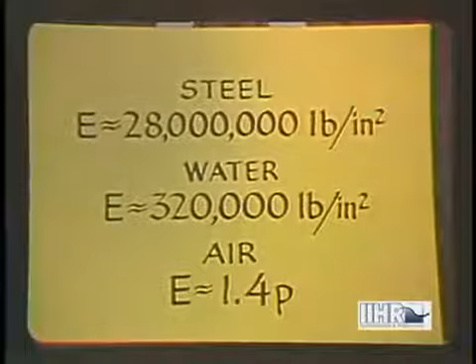Now we know that a substance even as rigid as steel has a finite elastic modulus, less than 30 million pounds per square inch. The modulus of a liquid, such as water, is about 1/100th as great, while that of a gas is very nearly the same as its absolute pressure intensity.

In the present film, we shall see what effect the actual elasticity, or its reciprocal, the compressibility of a fluid, has upon the patterns of motion that we have studied.

Under static conditions, the effect of compressibility is the variation of the fluid density with the pressure load, as may be seen by writing the definition equation for the elastic modulus in the form of a proportion.

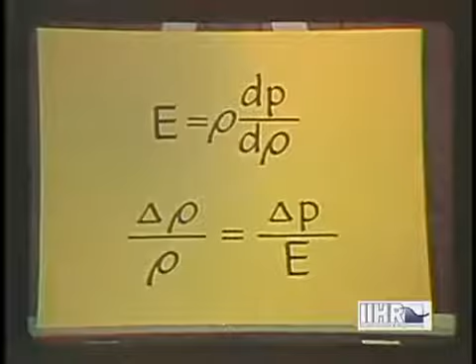Even at the bottom of the ocean, however, the relative increase in the density of the water is only a few percent because of the great magnitude of the elastic modulus.

The density of a gas, on the contrary, can vary from that of its liquid state under very high pressure to its standard value at atmospheric pressure. And we know that the density of air varies from its standard value at the Earth's surface to essentially zero in outer space.

Under non-static conditions, on the other hand, the effect of a local change in pressure is to produce a density change that is propagated elastically from the point of generation with the speed of sound. This speed, which we will call the elastic wave celerity, depends solely upon the elastic modulus and the density of the fluid under consideration.

As you will recall from the study of elementary physics, there is a great deal of similarity between waves of different types. In fluid motion in particular, a close analogy exists between gravity waves occurring at the surface of a liquid and elastic waves occurring within either liquid or gaseous media.

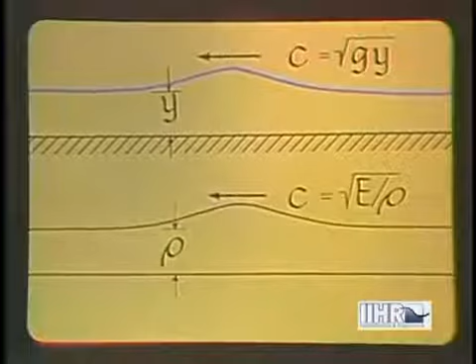Thus, whereas the schematic diagram of the propagation of a gravity wave represents a simple change in water depth, the same diagram could be used to represent the propagation of an elastic wave, the wave profile now representing a local change in density. Since elastic waves are usually visible only through use of a rather complex optical system, which we shall illustrate later, this analogy provides a very convenient means of simulating elastic waves by their gravity wave counterparts.

Elastic waves in water really correspond to gravity waves of negligible amplitude, because the change of density of a liquid is always very small compared with the density itself. A gaseous wave, on the other hand, is without limit in amplitude.

It has already been seen that a gravity wave of increasing size will become steeper and finally break. The elastic wave equivalent of such a breaking wave is known as a shock wave, about which more will be said at a later point.

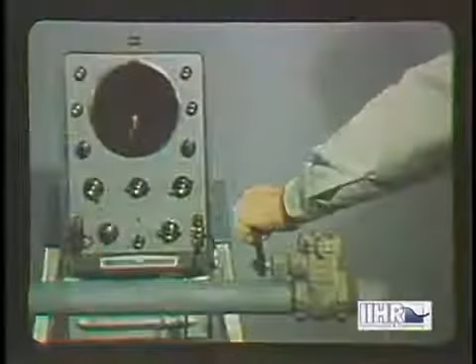As was shown in the first film, the sudden closure of a valve at the end of a long pipe causes an elastic surge to be propagated back and forth between valve and reservoir at sonic speed. At the reservoir end of the pipe, it is always reflected negatively, and at the valve end, it is always reflected positively, as a result of which the pressure fluctuates rapidly between positive and negative values, the waveform being influenced also by the elasticity and resistance of the pipe.

If the initial velocity of the water is very high, the initial pressure rise can be so great as to cause rupture of the pipe. Conversely, the reduction in pressure when the wave becomes negative can produce cavitation of the liquid, as seen here in slow motion, the initial vapor pocket thereafter collapsing against the valve and then tending to reform repeatedly. Because of the noise that is produced by the sound wave in either case, the phenomenon is very aptly called water hammer.

The best way of preventing water hammer is to require that the valves be closed slowly enough to hold the pressure at a safe value. Moreover, pressure tanks containing air set into the line will very effectively cushion the pressure changes.

Not only is the flexibility of the pipe involved to an appreciable degree, but in the extreme case, that of the fluid is negligible in comparison with that of the boundaries through which it flows.

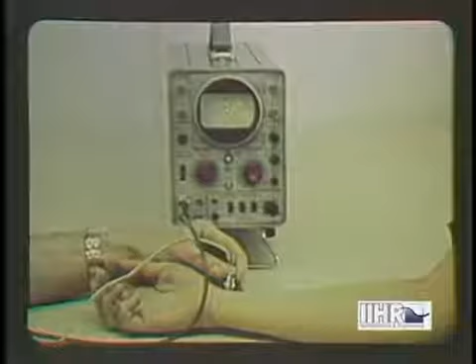This condition is found in the arterial system of the human body. The pulse, which might aptly be called blood hammer, is transmitted from point to point along an artery by virtue of the elasticity of the blood vessel itself. The initial wave is generated, of course, by the pumping action of the heart.

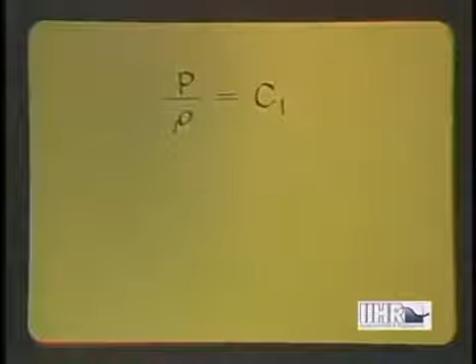So long as the density changes are small, elastic waves in gases differ little from those in liquids. When the density changes become appreciable, on the other hand, use must be made of the gas equation introduced in the first film. For isothermal flow through a long pipe, the density will vary directly with the pressure, and the velocity inversely with the density.

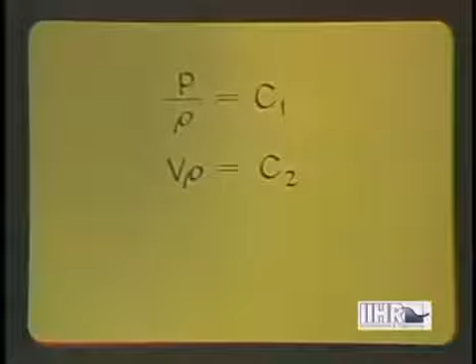Therefore, even though the pressure decreases because of the wall resistance, the Reynolds number and resistance coefficient will remain constant. Such flow is closely analogous to the flow of water in a long channel that ends in an abrupt overfall.

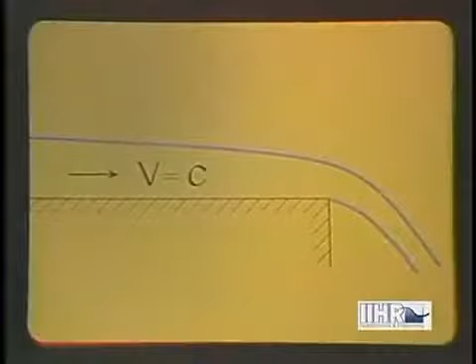As the depth of the flow decreases with distance downstream, the velocity increases and the Reynolds number remains constant. The limiting depth of the water is that corresponding to critical flow near the brink.

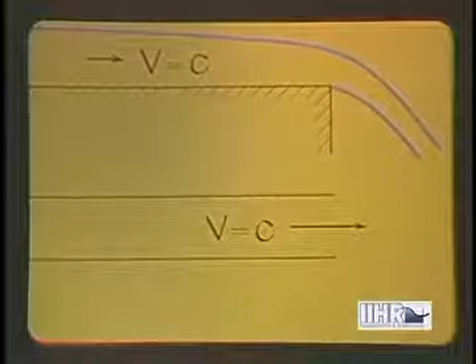Similarly, the limiting density of the gas at the outlet will be that corresponding to the velocity of sound at atmospheric temperature.

In flow with constant density, the pressure drop varies according to the usual Weisbach equation. If the change in density is appreciable, however, the pressure drop will be increased in accordance with the density change, as indicated by the term within parentheses.

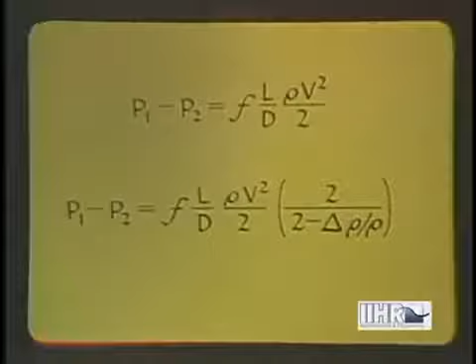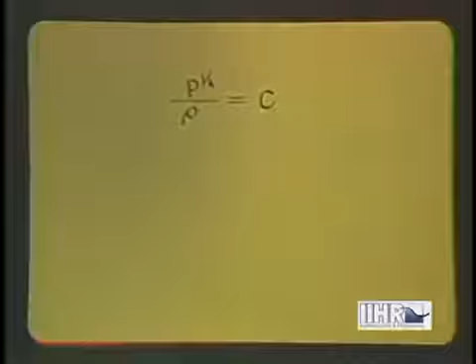If instead of the temperature, it is the heat content that does not change, the pressure density equation involves the adiabatic constant K. If this is combined with the equation of motion for negligible resistance, a result will be obtained which differs from that for an incompressible fluid by an amount depending on the density and the change in velocity between any two sections.

In other words, in adiabatic flow, a pressure change introduces a temperature change, which augments the change in pressure.

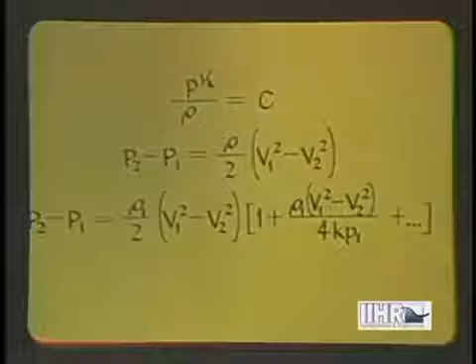Otherwise, the flow is closely analogous to that of water in the case of a local constriction. Under normal conditions, the flow at the constriction passes from the subcritical state to the critical at the crest as the tailwater is lowered. This corresponds to conditions of maximum discharge, which remains constant as the tailwater continues to fall.

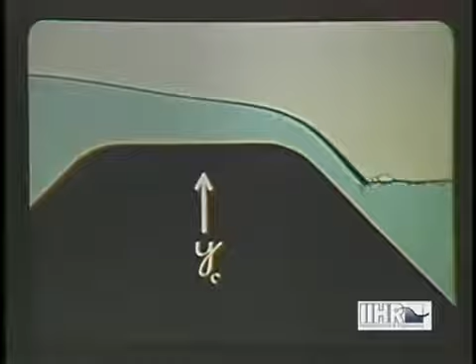Similarly, the discharge through a gas nozzle becomes a maximum when the pressure reaches its critical value, and thereafter the velocity remains that of sound, corresponding to the horizontal solid line at the upper right, even if the external pressure continues to drop according to the sloping broken line at the lower right.

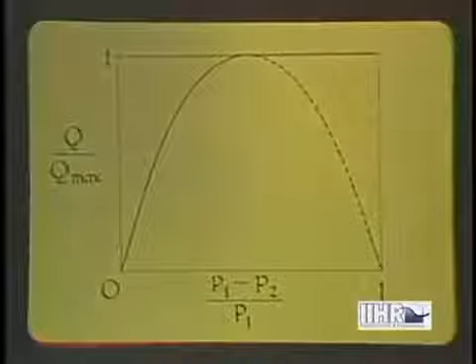Adiabatic flow can involve standing waves, just like the gravity flow of water, the flow at each section being equal to the celerity of either an elastic or a gravity wave under the corresponding conditions.

If free surface flow approaches a zone of stagnation, say on the front face of a pier, the surface will tend to rise in a standing wave to a level coinciding with the line of total head.

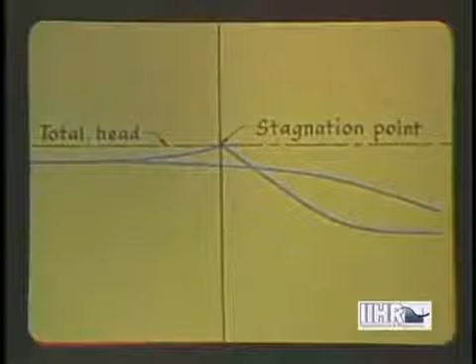Much the same thing occurs when a gas approaches a state of stagnation, say at the nose of a pier or pitot tube. But the temperature rise now causes the pressure rise to be still greater.

The two-dimensional aspects of wave propagation are even more significant than the one-dimensional. If a periodic disturbance exists in a fluid moving at a very small velocity compared with the wave celerity, the series of wavelets that are formed will be practically symmetrical about their source.

As the velocity of the flow increases, however, the wavelets will move upstream less rapidly and downstream more rapidly, with the result that the pattern will become more and more asymmetric.

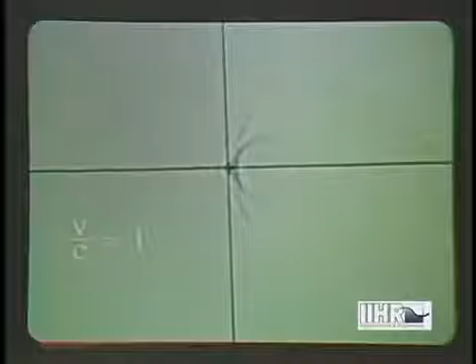When the velocity of the fluid becomes equal to the celerity, the upstream motion will be reduced to zero, and the wavelets will all be tangent to a normal line passing through the source.

Still further increase in the velocity of the flow will cause all portions of the wavelets to be carried downstream. The lines of tangency subtend an angle which becomes smaller and smaller than 180 degrees as the ratio of fluid velocity to wave celerity increases above unity.

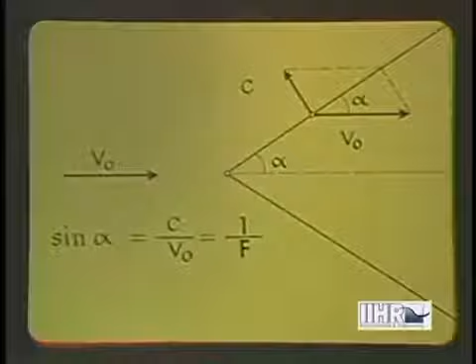Half this angle is known as the Mach angle. The reciprocal of its sine is simply the Froude number in the case of gravity waves. In the case of elastic waves, its counterpart is known as the Mach number.

Any body that is involved in relative motion with a fluid at a velocity that is either a fraction or a multiple of the wave celerity will produce a comparable flow pattern.

Each element of a curved wall can be regarded as a disturbance producing its own wavelets, the converging wavelets combining to form a surge or shock wave, which eventually moves upstream as the angle, and hence the wave, becomes too great.

If the change in wall direction is abrupt rather than gradual, the shock wave will begin right at the discontinuity, again starting to move upstream as the angle of the wall becomes excessive.

As shown in these sequences made at the Aberdeen Proving Ground, the optical method known as Schlieren produces a refraction of light that varies with the density or pressure of a flowing gas.

Here, subcritical flow is developing past a sphere, the zone of positive pressure above the axis becoming green, and that of negative pressure red. Below the axis, the opposite is true.

As the flow becomes supercritical, the shock wave that forms is seen as green above, and the zone of rarefaction just behind is red. Note that the shock wave is well ahead of the boundary at the line of symmetry.